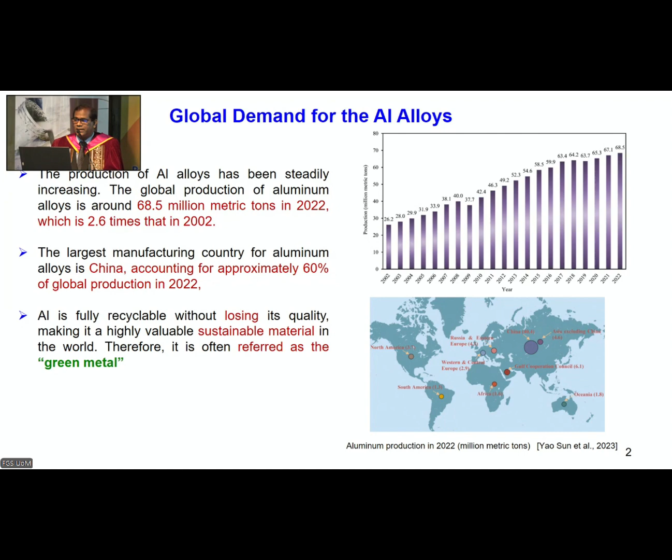So when we look at the aluminum alloy designation system, that is established by the International Alloy Designation System, IADS, based on the classification developed by the Aluminium Association of the United States.

So here I am not going to take this moment for a long lecture, but briefly I explain you. So simply, what is meant by alloy? You know about pure aluminum, which is a ductile material with higher thermal and electrical conductivity, and which has FCC crystal structure. So when we mix some other alloying elements with the aluminum, then we say that is an alloy.

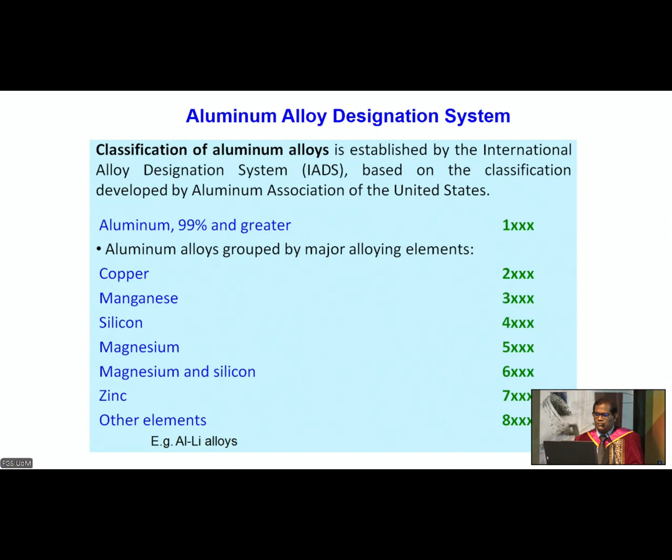So basically, in aluminum alloys, we can see a series of aluminum alloys. For example, the aluminum 2 series means aluminum copper alloy. So with that, I move to explain you this 4-digit system briefly.

So what is aluminium 6063? Why do I select aluminium 6063 especially? Because it's used in door window frames, some structural applications, bars with various sections. So all these things are produced with aluminium 6063. Locally, we can see established companies like Alumex, Swisstek, Lanka Aluminium. They produce aluminium components with this alloy.

As I mentioned, the first digit 6 means the aluminium, magnesium, and silicon alloy. The second digit indicates the originality: 0 means it's the original alloy. When we do some modifications, it takes other numbers. The last 2 digits, 63, mean the specific alloy contents for this alloy: silicon 0.2 to 0.6 and magnesium 0.45 to 0.9 weight%. In addition, there are some other minor elements like iron and copper.

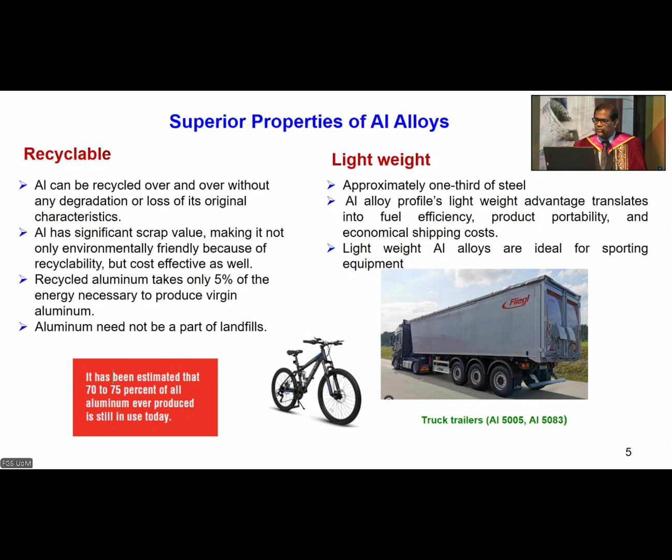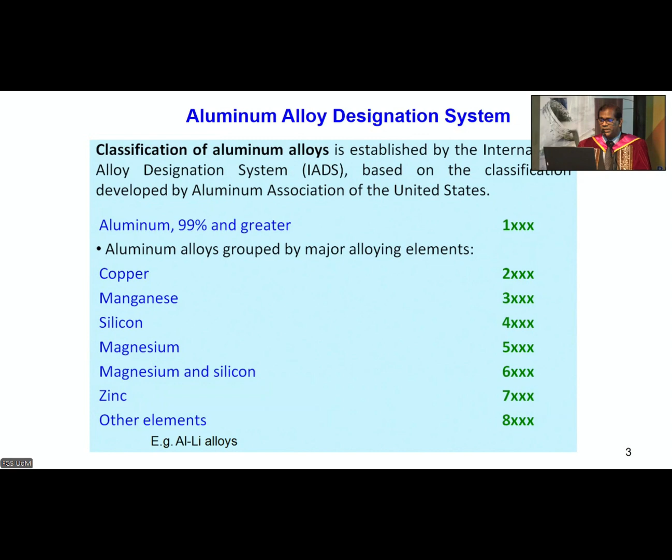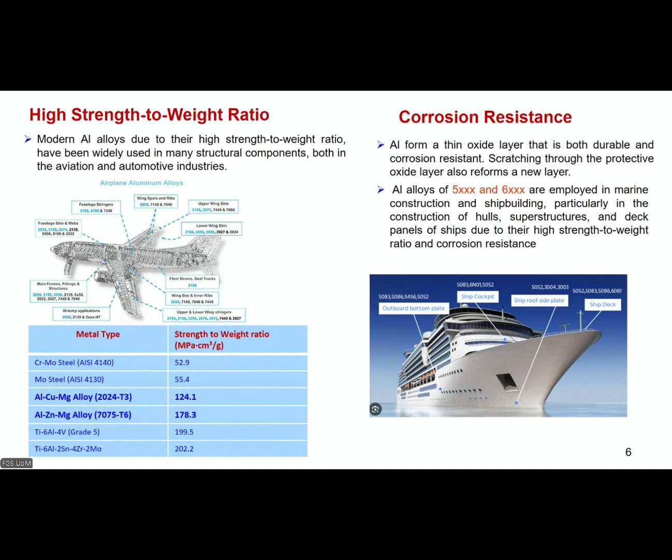And regarding corrosion resistance, it's a very simple thing: aluminium forms a thin oxide layer that is both durable and corrosion resistant, and scratching through the protective oxide layer also reforms a new layer. Because of this characteristic, in marine construction and shipbuilding, particularly in the construction of hulls, superstructures, and deck panels of ships, due to their high strength to weight ratio and corrosion resistance, aluminium alloys are used for various parts of ships and marine structures. Especially the aluminium alloys 5 and 6 series are employed in these applications.

And as you can see, there are some other significant properties: thermal conductivity. We use extruded aluminium heat sinks for applications such as electronics, and it's a non-toxic material and also non-magnetic.

With that, I'm moving to explain the strengthening mechanisms of aluminium alloys - why, compared to pure aluminium, aluminium alloys have higher strength and hardness. That is due to the strengthening mechanisms applying to aluminium alloys. Basically, we are applying 4 strengthening mechanisms. In all these mechanisms, the theory behind it is making a barrier for dislocation movement.

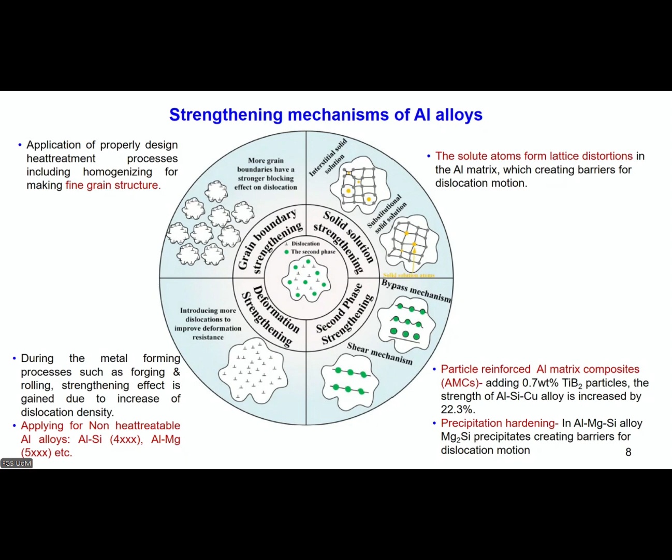I'll briefly explain the precipitation hardening process highlighted here. How does aluminium 6063 gain strength nearly 3 times higher than pure aluminium? Here, alpha means the solid solution of all solute atoms - aluminium, magnesium, silicon, copper, iron - all in a solid solution. We call that alpha.

Beta means the precipitates formed in the matrix. In aluminium 6063, especially magnesium silicide is the precipitate responsible for gaining strength and hardness. In addition, some other precipitates form - these are iron-based precipitates. Iron is actually an impurity here, so it is required to minimize the formation of iron-based precipitates.

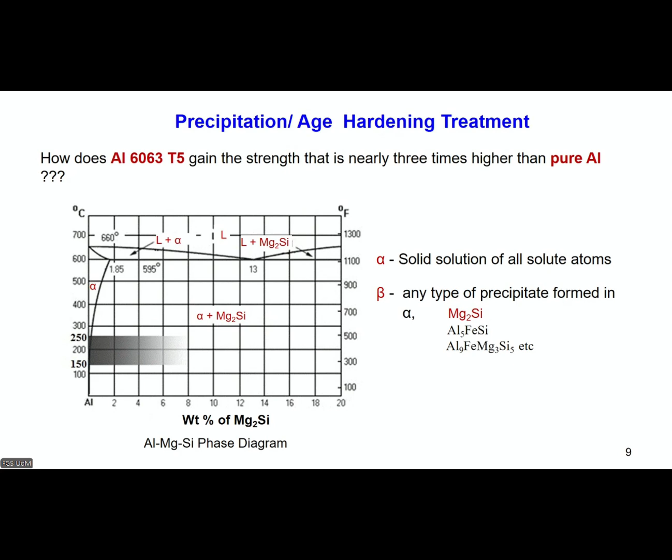In this aging process, there are basically 3 stages: solution treatment, quenching, and aging treatment. Initially during solution treatment, all the precipitates segregated in the grain boundaries are dissolved in the structure. After quenching, either air quenching or water quenching is applied, then we move to the aging treatment.

Simply, the aging treatment involves heating up to around 200-210 degrees and keeping that temperature for around 1.5 hours. This is the heat treatment applied in local aluminium extrusion manufacturing companies. You can see in this image how the magnesium silicide precipitates, with a size of around 30-40 nanometers, are distributed in the matrix. These precipitates, as explained, make the barrier for dislocation movement, creating the strengthening effect.

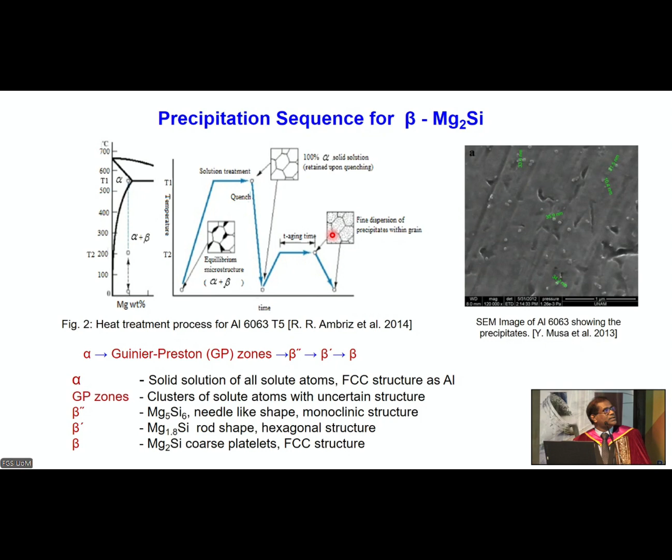Yes, so this is the aging treatment I discussed. As you can see, the hardness and strength gained for the extrusion - for example hardness 47 - shows strength of nearly 230 megapascals. The total time period for this heat treatment is 270 minutes.

With the development of the two-step aging hardening process, the total time period is reduced to 220 minutes. That is the significant finding in this research - a 50 minute reduction in the aging time period. With that, the industry can increase the production rate and also reduce the energy cost.

And the mechanical properties also increased with a significant level, as you can see here, the hardness and strength.

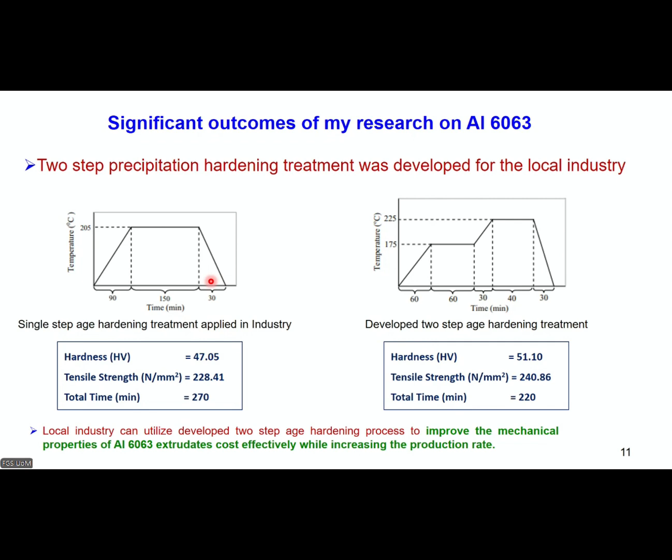This is another research I conducted: development of a mathematical model to relate the aging parameters to hardness and tensile strength of aluminium 6063. I am happy today because the research student who conducted this research under my supervision is here, Mr. Sivanujan. In this research, as I said previously, the aging parameters are aging time and temperature. For a given combination of aging time and temperature, we can achieve a certain level of mechanical properties, strength and hardness.

But it was revealed that there is no research work conducted to comprehensively explain how the precipitate size distribution affects these mechanical properties, and to find the best combination of aging parameters to achieve the required level of mechanical properties. It is required to find a mathematical model.

For example, in Alumex they are using a certain combination for aging time and temperature that they've used since a long time ago. And in other aluminium manufacturing companies too, they slightly change that without any scientific basis.

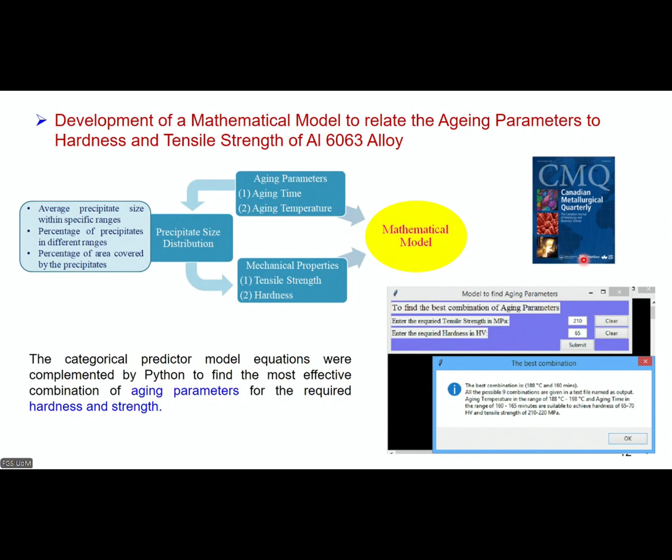And now I am moving to discuss the superior applications and innovations of aluminium alloys. As you may know, the Heifer International World Headquarters, the global non-profit organization, is in Arkansas, USA, working to eradicate poverty and hunger.

This comprised extruded aluminium 6082 components on the building's exterior that block excess sunlight to reduce solar heat gain, and light shelves made from extruded aluminium alloy subframing were installed inside the outer walls to bounce light up, redirecting natural light to reflect it further into the building. A nice architectural design using aluminium 6063.

And here I need to stress the point: 97% of the project's aluminium components contain recycled aluminium alloys.

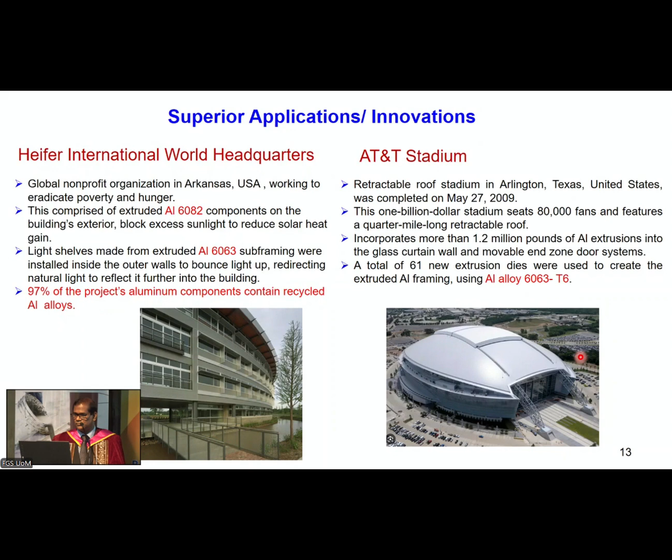Also, one of the significant innovations is the International Space Station, ISS, the largest technology-intensive construction project ever undertaken by humankind, assembled in low Earth orbit through collaboration of 5 international space agencies. Its primary purpose is to perform space environment research in 6 laboratories there. The ISS extruded integrated truss sections span the length of a football field, that is 310 feet.

And the ISS takes advantage of aluminium extrusions: lightweight, corrosion resistant, and especially critical structural strength in the extreme cold of space. So here you can see 16 extruded aluminium 6063 truss segments form the structural framework that houses the cooling systems and photovoltaic arrays that power the 6 laboratories.

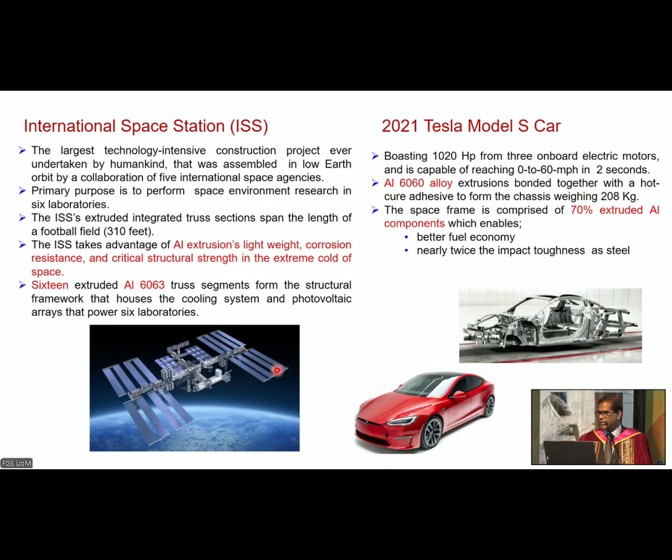And with that, I am moving to 3D printing, one of the emerging technologies we discuss today - the 3D printing of aluminium alloys. As you may know, 3D printed aluminium alloy components are built up layer by layer with a high level of design freedom and manufacturing flexibility. Here especially the aluminium-silicon-magnesium alloy, a special aluminium alloy, is used for 3D printing.

There are many 3D printing methods used for aluminium alloys, but I just mention two methods here, starting with powder bed fusion. It's a simple mechanism. The aluminium powder is used as a powder, stored in this section, which is a movable part. When it moves upward, the powder comes out and moves to this section with the powder roller. We give specific space for this powder, and using a heat source, maybe a laser or electron beam, the aluminum powder is fused together and made to solidify.

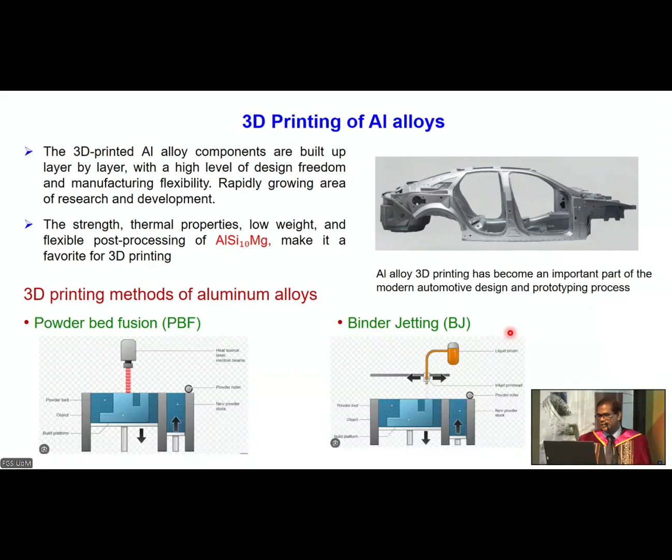This is the last part of my inaugural lecture: nanotechnology in aluminum alloy enhancement, the role of nanotechnology. Nanotechnology is involved in various ways for aluminum alloy enhancement, but here I focus on the strengthening mechanism part, specifically particle reinforcement.

How to do this? By incorporating hard nanoparticles such as aluminum oxide or silicon carbide into the aluminum matrix. These nanoparticles act as reinforcements, blocking the movement of dislocations and significantly strengthening the material. For example, adding alumina nanoparticles to an aluminum alloy can increase its strength from 300 megapascal to over 600 megapascal, more than double.

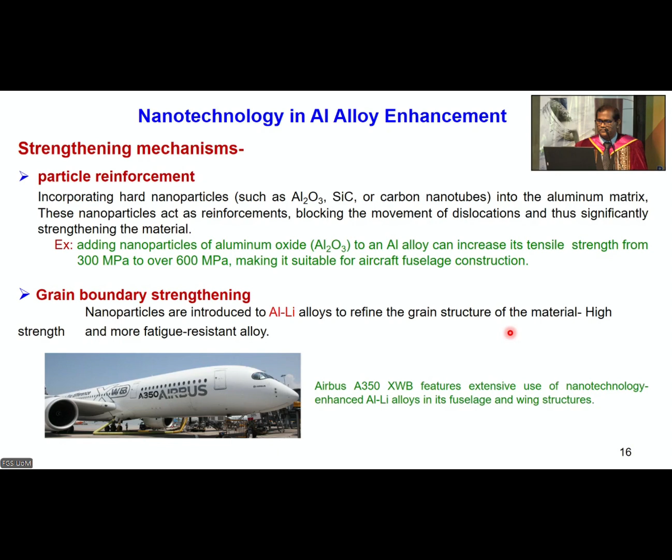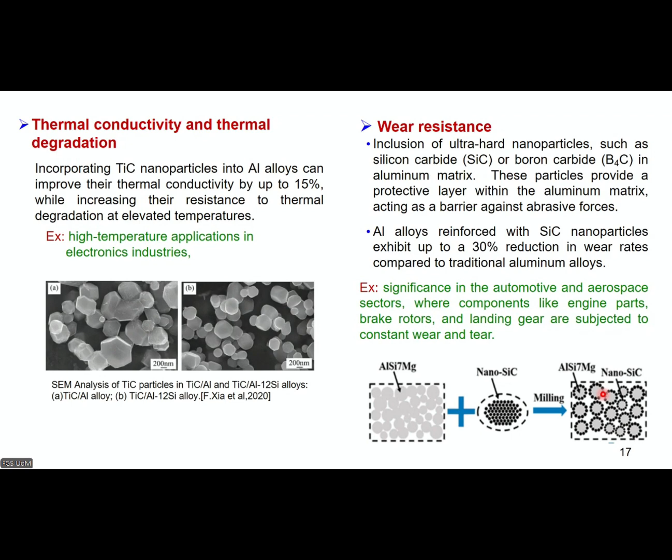With that, aluminum alloy reinforced with silicon carbide nanoparticles exhibits up to a 30% reduction in wear rates compared to traditional aluminum alloys. It's a significant improvement.